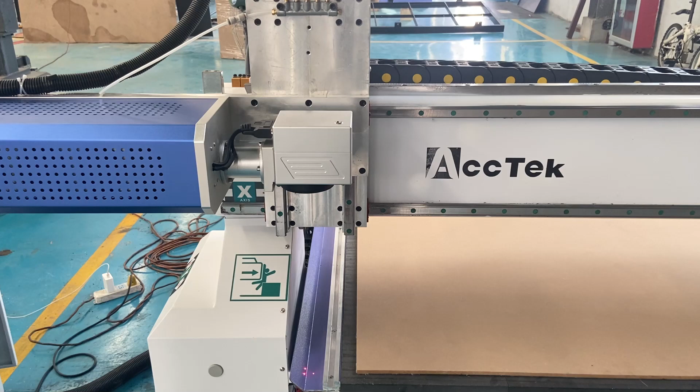Open the machine control box. Connect the machine power supply, neutral line, live line, and ground line.

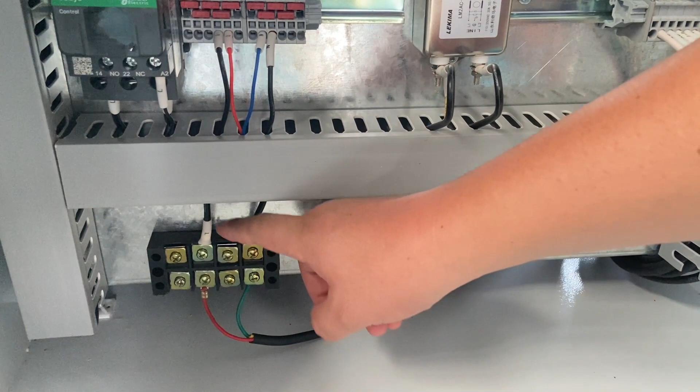Find the location of the marking machine controller, plug in a USB cable, connect the other side to the computer converter, and plug in the dongle.

Turn on the power switches successively.

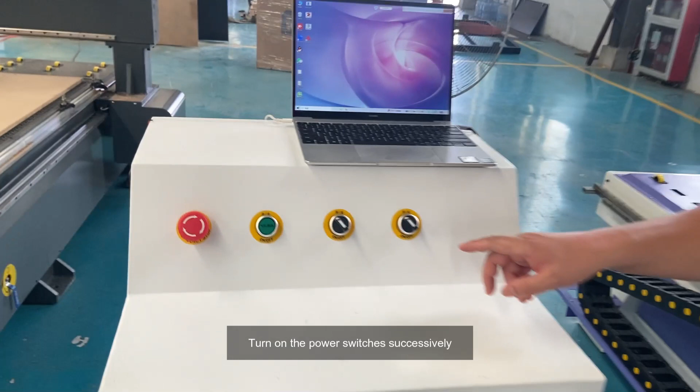Find a folder named EzCad3 from the disk, open it one by one to find the launcher, and send the program to the desktop.

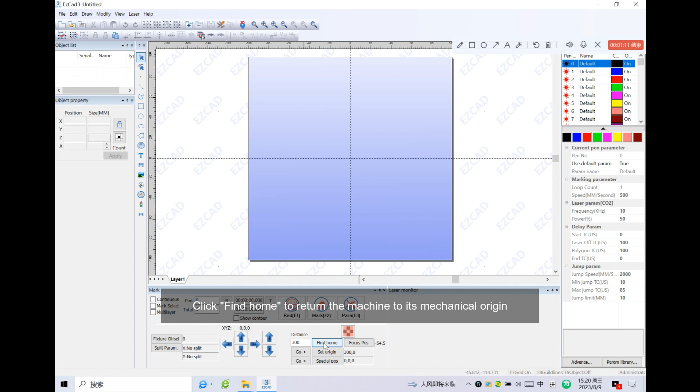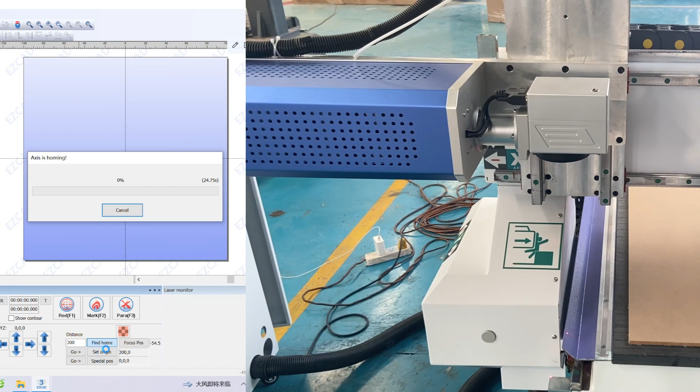Import vector graphics files that need to be marked. You can also use the software's built-in drawing tools to make images.

If it is a larger image, you need to splice the marking. First, you need to put the bottom left corner of the entire production graphic on the center point of the processing area.

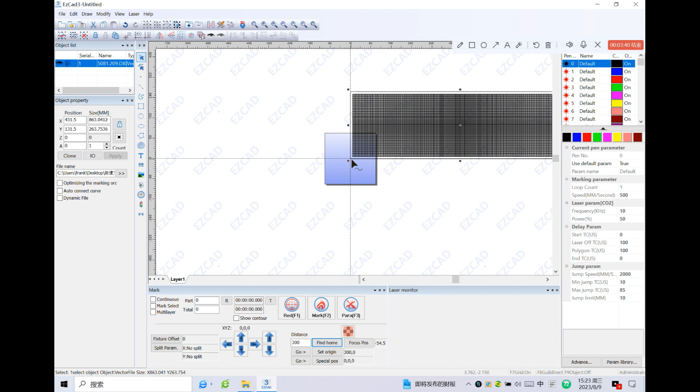Click Split Param to set the split size.

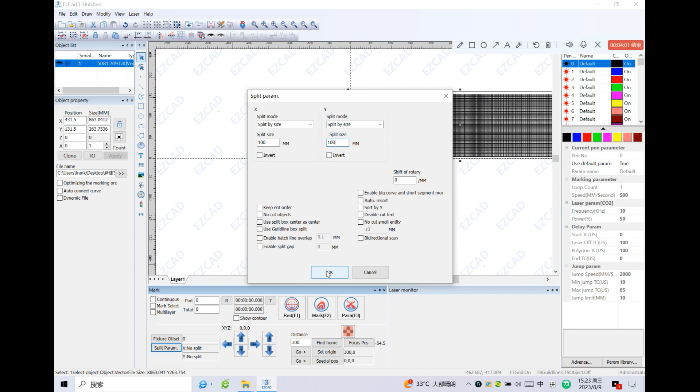Move the field lens to the appropriate position above the material, and set the current position to the machining origin coordinate.

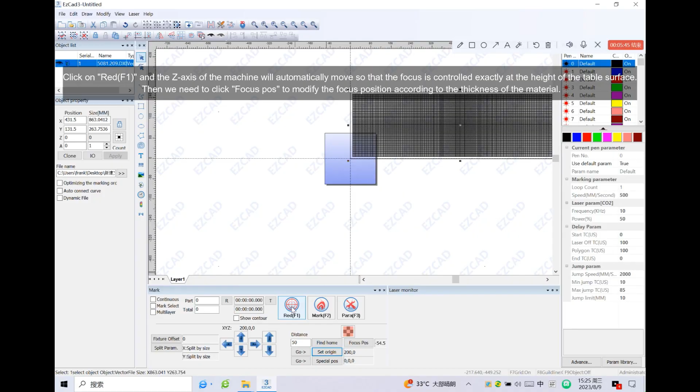Click on red F1, and the Z-axis of the machine will automatically move so that the focus is controlled exactly at the height of the table surface.

Then we need to click Focus Pos to modify the focus position according to the thickness of the material.

After determining the focal length, click on